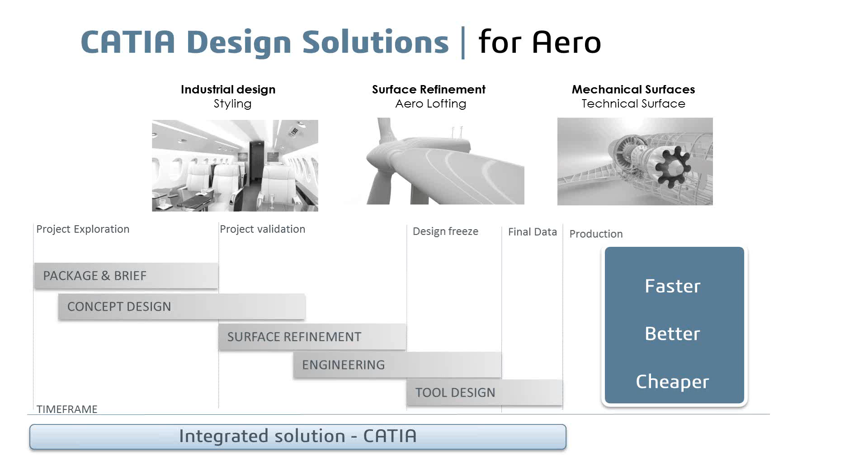The goal of addressing this new market with CATIA is to offer our customers a complete solution, allowing Aero companies to go from industrial design to lofting design surfaces to mechanical surfaces, improving the collaboration between all the organization through the creative process, from early styling ideas to technical surfaces and Aero surfaces.

So the topic of today is really to focus on creative design, especially interior cabin design. With our solution, we want to address the four key challenges of Creative Studio.

First, to help creative designers develop creativity with innovative 3D sketching and concept modeling solutions, but also at any time be able to take accurate strategic design decisions with physical prototypes and very advanced high-end visualization tools. The third point is also very important: to help the design studio collaborate with the rest of the organization, from engineering to manufacturing, and then also improve the perceived quality of the product design.

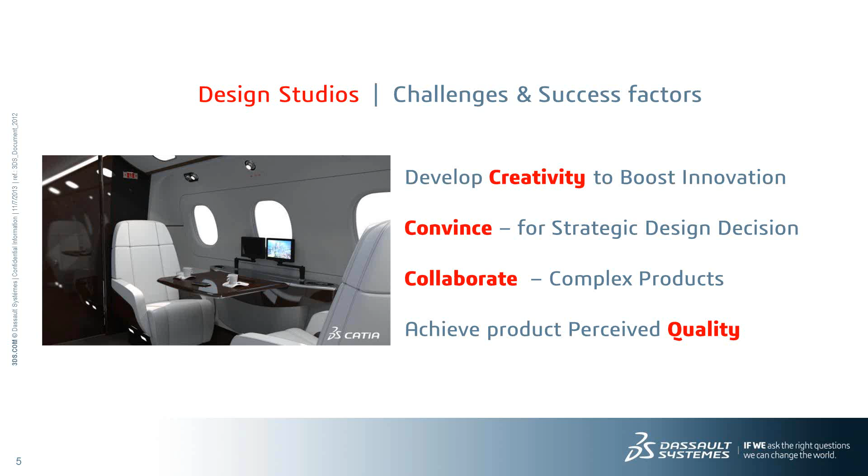So for that, we have introduced, since four years now, a new solution called CATIA Creative Design, to really cover the complete creative workflow with a unified industrial design workflow solution that you will discover during this presentation with Pierre Maillot and Fabio Bellari.

The second aspect of our strategy is really to bring 3D accessible for creative people, to make it simple, and that's why we have introduced some innovative technology like 3D sketching or virtual clay modeling, to really bring 3D back to being easy to use and accessible by creative people.

The third point, which was very important for us, was also to help streamline the design engineering collaboration. That's why it was very important for us to address the creative people with a dedicated solution on the same platform, which is CATIA.

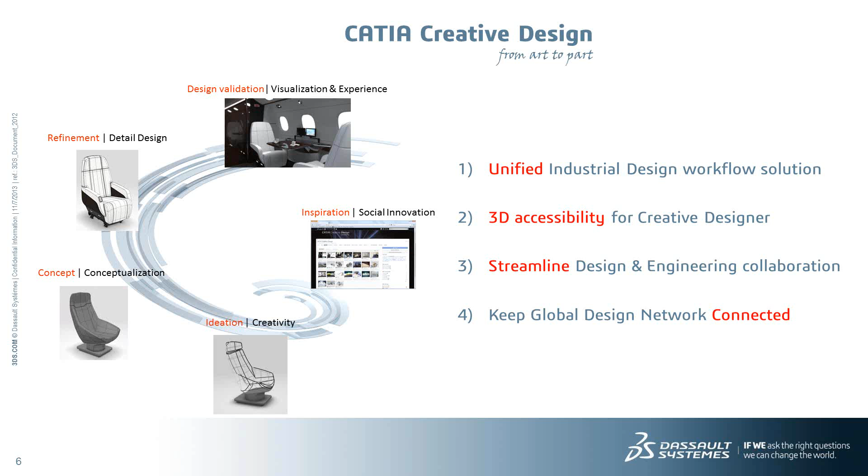And then with the 3D Experience platform, the V6 architecture, we also help the creative designers to be connected to their global network of designers and engineers.

Having said that, as an introduction, I will now give the floor to Pierre Maillot and Fabio Bellari to illustrate the aircraft cabin design with CATIA Creative Design and CATIA Icem.

Thank you, Xavier. Welcome, everyone. Here we go for the aircraft cabin design process.

Let's start with what we have introduced with our new solution, having a new way of designing interior and cabin in the aircraft industry by always starting with sketches, with 2D sketches. It could be digital or handmade. That's something we really want to keep as input for the creative work: keeping the digital sketch and hand sketches being the starting point of the story.

Afterwards, we will go through 3D sketches, and that's really something that helps us out to make this transition between the 2D and the 3D by keeping sketching and being able to do it in 3D. So that will be CATIA Natural Sketch.

Afterwards, to give surfaces and give a proportion of your final object, we will go through a 3D design exploration with subdivision surfaces of CATIA Imagine & Shape in order to quickly iterate in 3D and explore some of the proportion and size of our final object.

This interactive ray-tracing allows us to do color and trim reviews on the seat itself in order to validate the materials and also to iterate on the color and trim, but also having in-context visualization of our object, because here what we do is to design this seat in order to put it back into a full cabin design. And that's what we will see afterwards still with CATIA Live Rendering. Also being able to produce high level of renderings in order to do marketing.

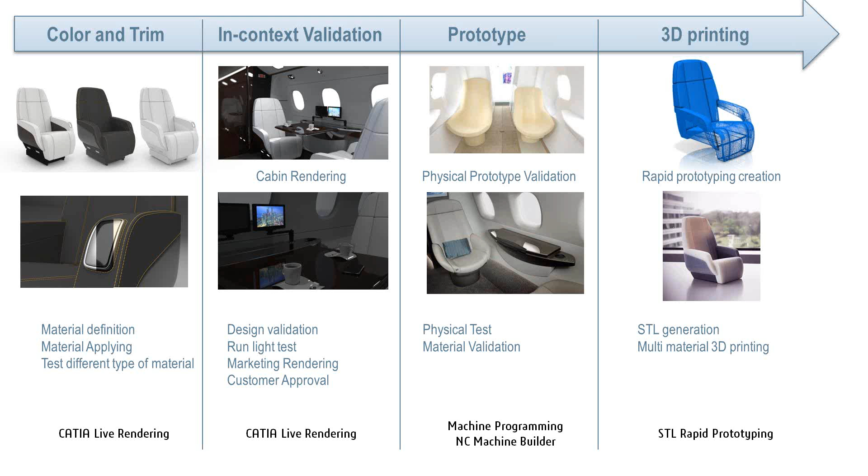And afterwards we will connect back to the real world with some prototype. It's something that we won't be illustrating because CATIA is already pretty famous for that. So machine programming and CNC machining is something that is completely embedded inside CATIA. And we will illustrate 3D printing by showcasing some scale 3D prints of the seat that have been directly produced out of CATIA using our 3D printer partner Stratasys.

So let's start now from the very beginning with 2D and 3D sketch. So in a short demonstration, I will show you how you can start, for instance, from a 3D context. Here it's the foot of the seat. You can quickly, by drag and dropping, import your sketches, so front views, side views, and use it as a reference to start your 3D sketch.

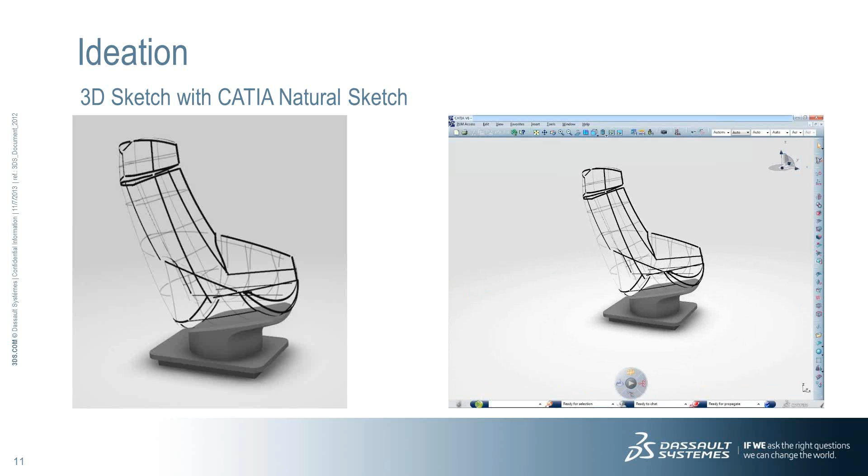Here, by combining several curves and keep on sketching, what I'm able to do is to create a full 3D curve, and then navigating into this 3D space, I am able to describe several other curves in order to give more inputs and describe completely my object in 3D. Again, at any time I can switch to perspective view, and that's the kind of results you can have after several seconds using CATIA Natural Sketch. As you can see, the interface is very simple, and we wanted to make it this way.

Now, the key value is being completely integrated inside a modeling software, so we are at any time able to generate a surface based on source curves. If we move the curves, then the surface will be changed depending on this variation. We can, of course, change the color of our brushes and add some detail. And here, the interesting point is we're able to draw directly on the surface we just have created.

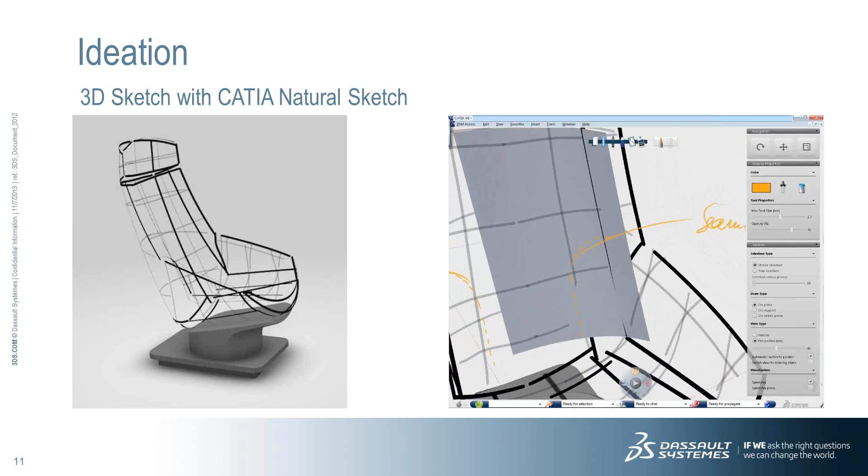So you can use any kind of support. It could be a 3D surface, but also a scan, a cloud of points, could be a support to be able to sketch on top of it. So here, for instance, and it's part of the process, is describing where we want to put the seam, and it's really giving the character to the final seat, and that's how you're able to do it with CATIA Natural Sketch. So very quickly, being able to switch and transform 2D sketches into a 3D reality with a 3D sketch.

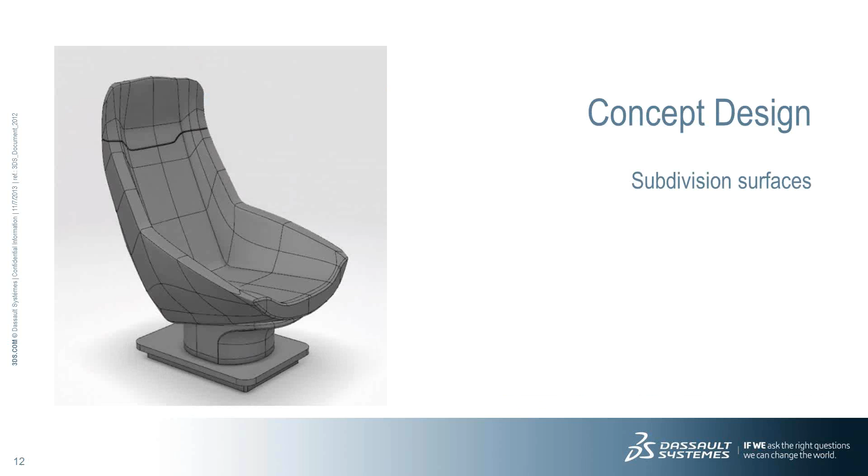Second point will be about the concept design itself. And for that, we will use subdivision surfaces, especially for this kind of design when you have very organic shapes. Subdivision surfaces are very flexible to be used in order to generate those shapes. So you can see that we start from a first surface that is already connected and start to deform it by pushing and pulling the mesh in order to generate the surface. So we are adapting it to the context of the foot of the seat.

Again, we are fully integrated inside the rest of CATIA, so it could be coming from engineering, it could be carryover from the former seat, and natively you access source data. And now using the interaction with the subdivision surfaces, we're able to add more details in order to do the armrest, for instance. And what is really nice with this kind of technology, coming from the movie industry at the very beginning, is that you can freely add more subdivision and transform it in order to generate the final shape. Also giving more smooth or hard edges in order to generate the shape that you really want at the end.

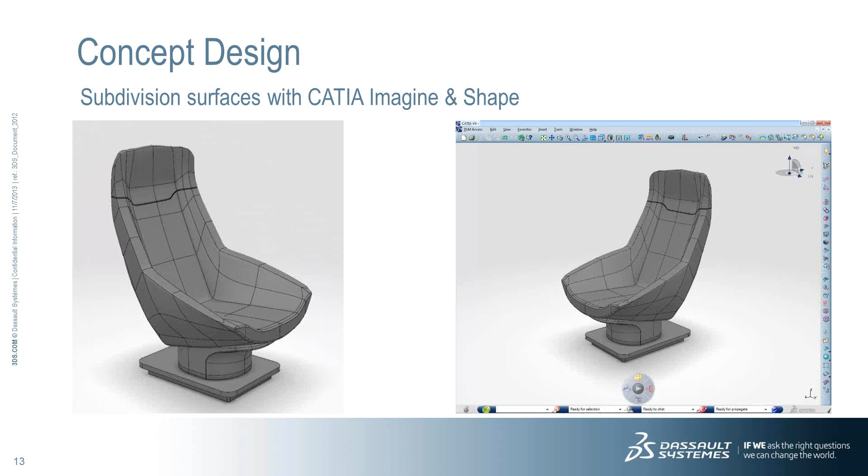Again, generating the fillet. Here, for instance, we are not satisfied with the fillet. At any time, we can change the size of it. What we wanted is, again, to do it very quick, and in a few minutes be able to generate your ideas in 3D and keep on iterating. If you want to change the size of it, change the armrest, change any part of it, it's very flexible to be changed. So now I will hand over to Fabio to go further in the process into detailed design.

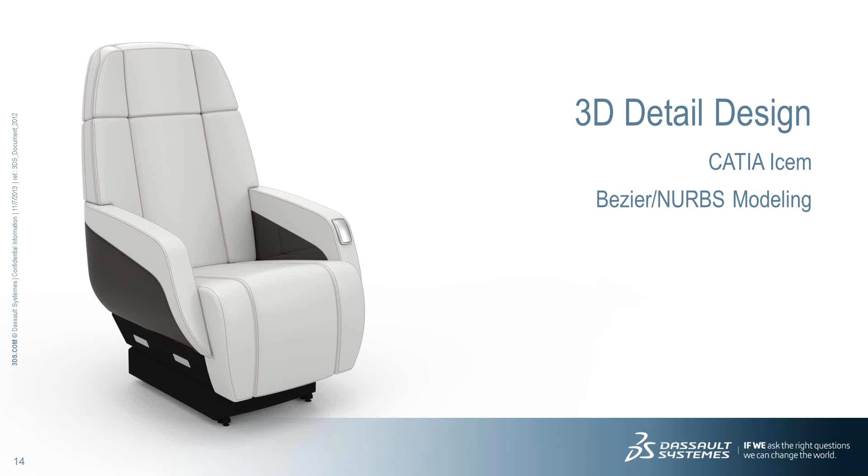Thank you, Pierre. So let's now have a look more at 3D detailed design. And for this, we will use a CATIA ICEM solution and classical Bezier NURBS modeling. Here is an example coming from the industry of a general seat. And the first thing we can notice is that the shape of this seat is really highly segmented. And in general, this means really bad quality of surface.

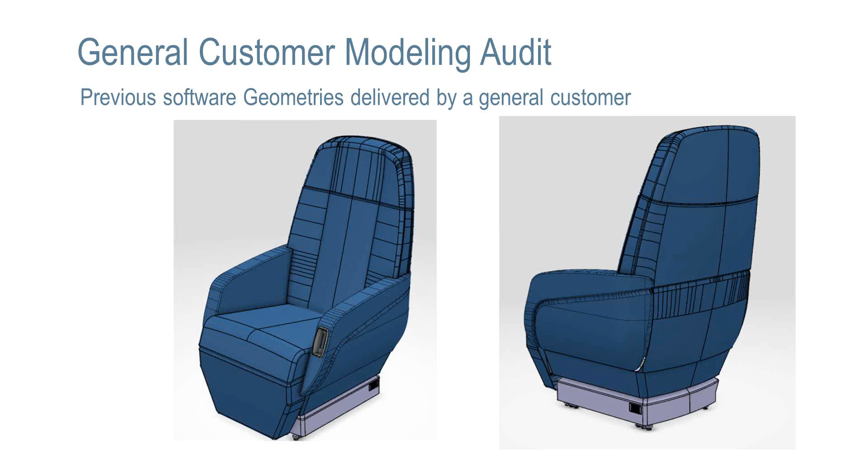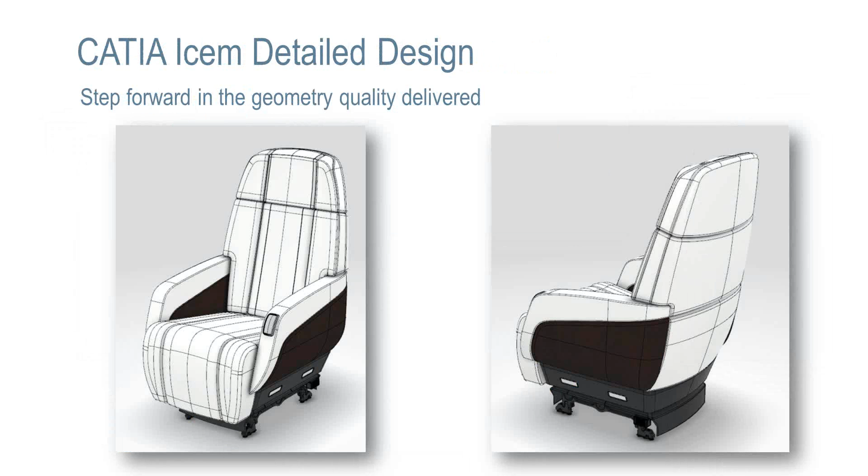So if we get closer and zoom in, we can notice that there are also some areas where filleting is missing. And as well, we can notice some clashes that are visible, and some areas where connection gaps and holes are present, and this really underlines the bad quality of this model. So we have made the exercise to remodel it back, and for this we have used CATIA ICEM technologies, and if we are getting closer, we can see the kind of result we can reach with this kind of geometry and technologies.

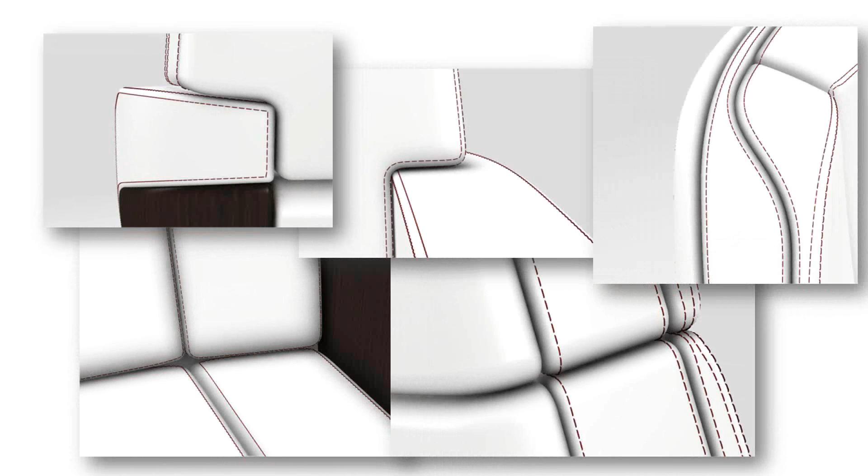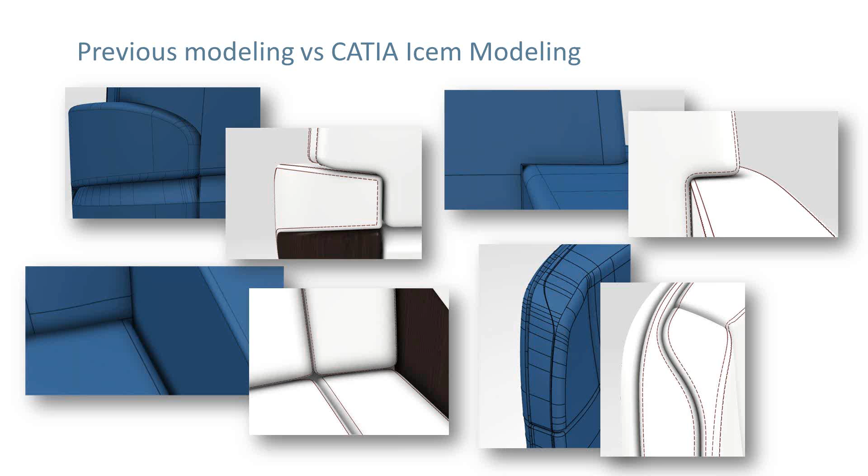If we compare the previous model and the new one, you can appreciate the difference between this kind of data. So the missing fillets are now there, clashes are no more present, and the general quality of the model, if you are looking at the gaps, is quite better. So how can we start with this kind of modelization? The first thing, we had a look at the model. We can identify 3 different kinds of area.

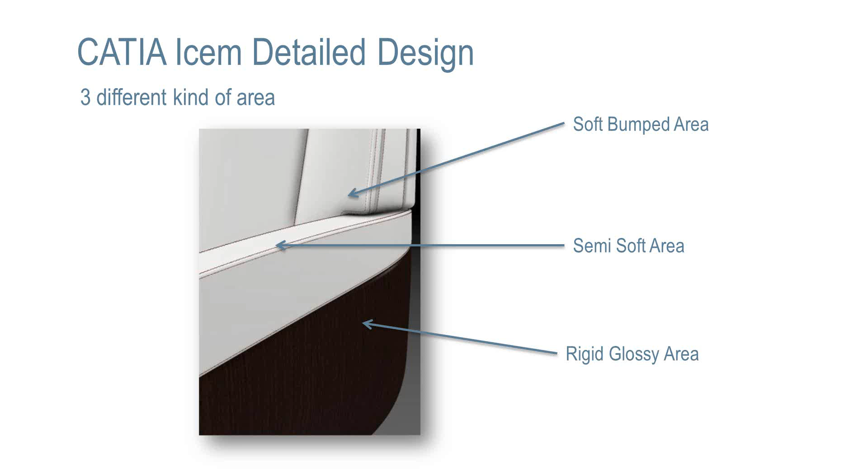The first one is an area which I call soft bump area, and this is because we really have the impression of this kind of bump, and it's covered by leather. The second area is what we call semi-soft area. It's still covered by leather, but is on top of rigid geometry. And the third area is what we call rigid glossy area.

And here you see how we can differentiate this kind of area. For the first one, we have used some function like the accelerated surface of CATIA Icem and Imagine Shape. This really to give the impression of softness of this surface. We really wanted to avoid mechanical surface effect on top of this area.

For the second area, we have used some CATIA Icem parametric G2 modeling, and for the third one, as it is glossing and reflecting highlight, we really get closer to the smoothed explicit Bezier approach, like for instance in Class A for exterior automotive.

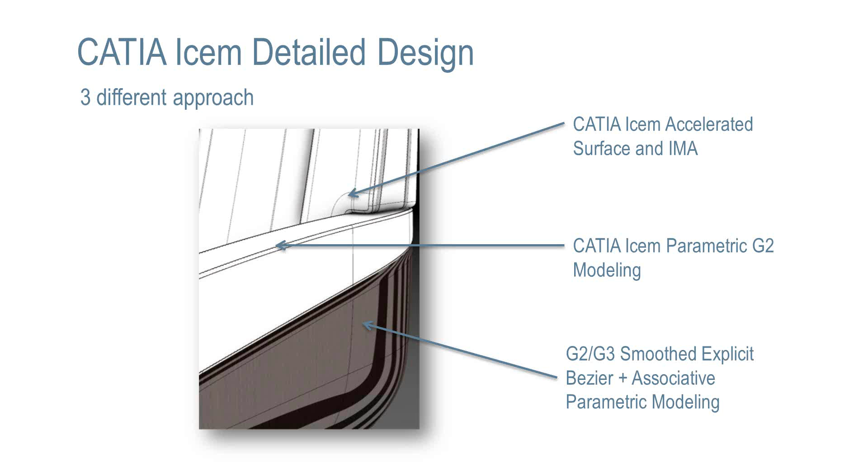And thanks to CATIA Icem, we can reach really high quality of connection up to G2 and G3, and we can really control the effect of this highlight on top of the surface. This really gives at the end an impression to have a luxury product.

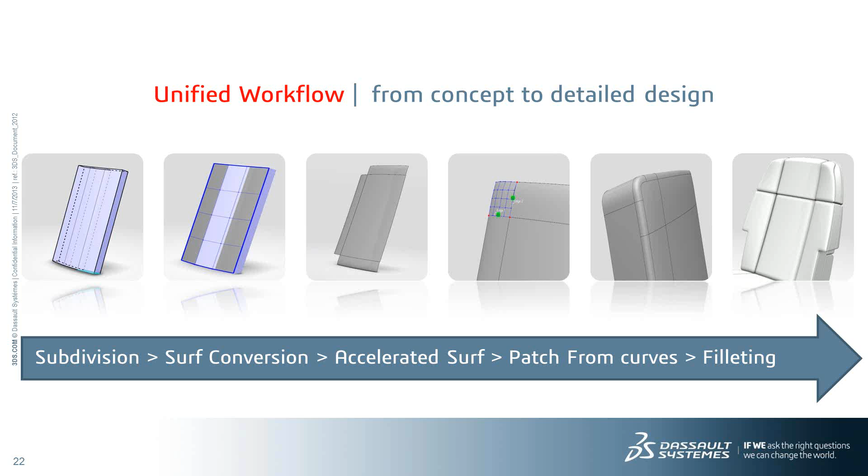So let's now dive into an example. This is a really easy and basic example. We start from a subdivision surface, then we move to surface conversion, and on top of it we add some accelerated surfaces. We close the corner with a patch from curves, connected up to G2 and G3, and then we close all the volume with the filleting. And this provides this kind of result.

Another interesting capability: we have used some advanced CATIA Icem modeling capability to project and reuse standard components from the library. So in this case, this belt has been projected on top of the shape, and we are able to move this geometry, and everything will be adapted as it is associated.

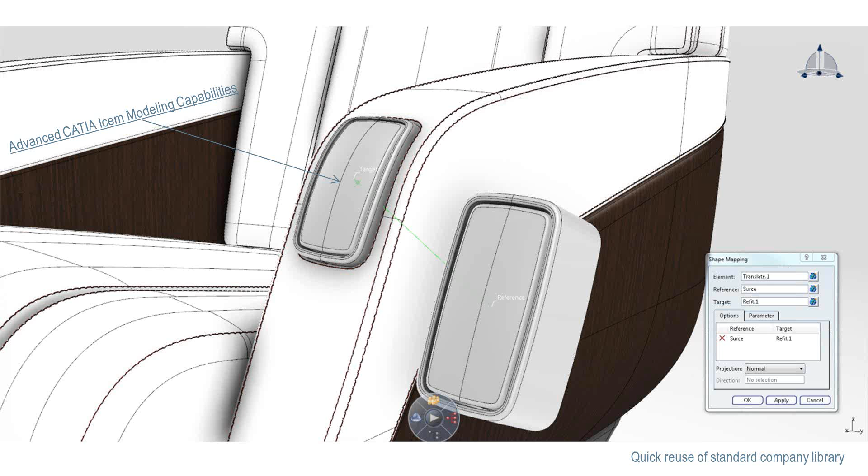Another interesting part of the detail design is the automatic generation of the seams. In this case, we are using standard CATIA capability like the knowledgeware in order to generate this kind of geometry automatically. We just select some input like the surface and the curve, choose some parameters like the step, and here we are able to generate and iterate on this kind of geometry in an automatic way.

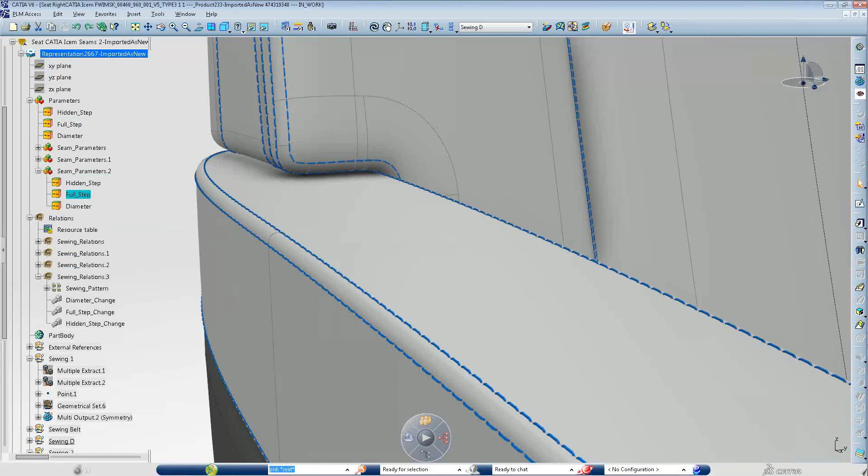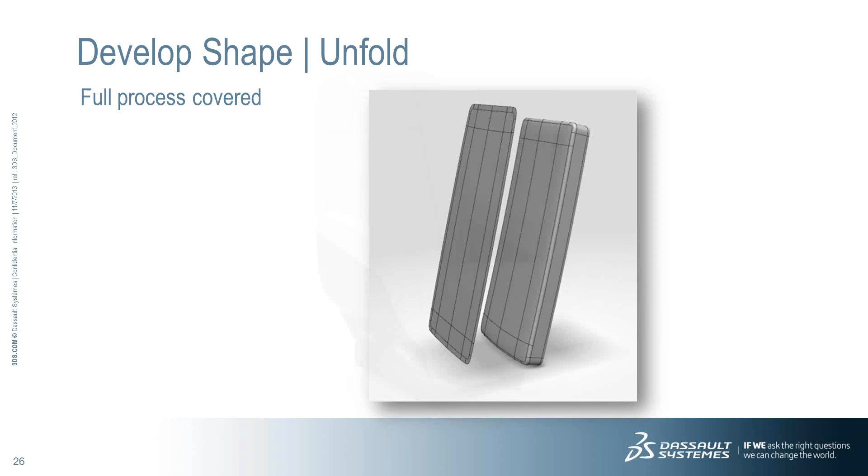And to conclude, as we cover the entire process, we are also able to generate the unfold surfaces, and this will provide us the area of the leather we have to cut, as well as the cutting boundaries of this leather. This is it for the detailed design. I give the hand back to Pierre for the color and trim and the in-context validation.

Thank you, Fabio. So as you have seen, now we have a high level of surfacing on the product, and we're able to access high-end visualization based on this geometry. What is interesting here is that we are directly working on the native data, so there is no data conversion. So that's kind of a clay color version of the model.

We will just switch to the real-time visualization, and we use CATIA Live Rendering, which embeds an interactive raytracing engine called Iray, coming from NVIDIA, in order to generate this kind of interactive visualization with reflections and global illumination for the whole cabin.

Usually this kind of situation is very difficult to do because there is a lot of smooth shadow and indirect lighting, so it's a really great challenge to be able to do it, and even to do it with interactive visualization. So in this example, we are able to change the exposure a little bit in order to generate exactly the visualization we want to have.

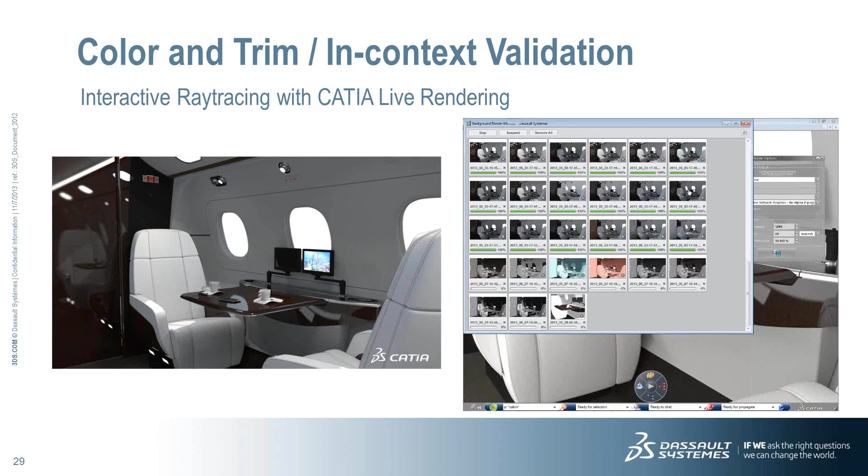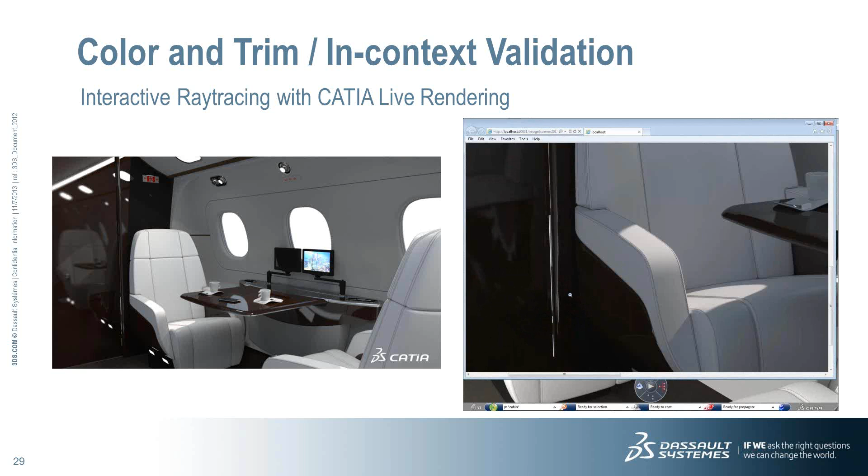We also made something very close to the photographic experience, in order to have a very simple way to generate images and to address people with a photography background. Now we're using what we call background rendering, in order to generate very high-end renderings in parallel while you keep on modifying or modeling. Because here again, you can keep on changing surfaces and just push a button and see the results with ray tracing, global illumination, and smooth shadow.

So here are some of the results of the color and trim variations we made. As you have noticed, we were able to generate the seams, and we can use them as input for the color and trim variation. We can iterate on the color of the seam and the material of the seam, but also the size and the space between each of them.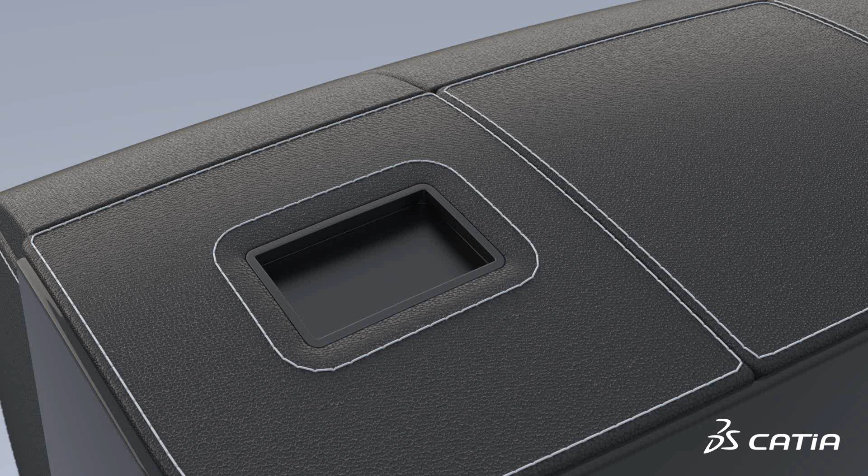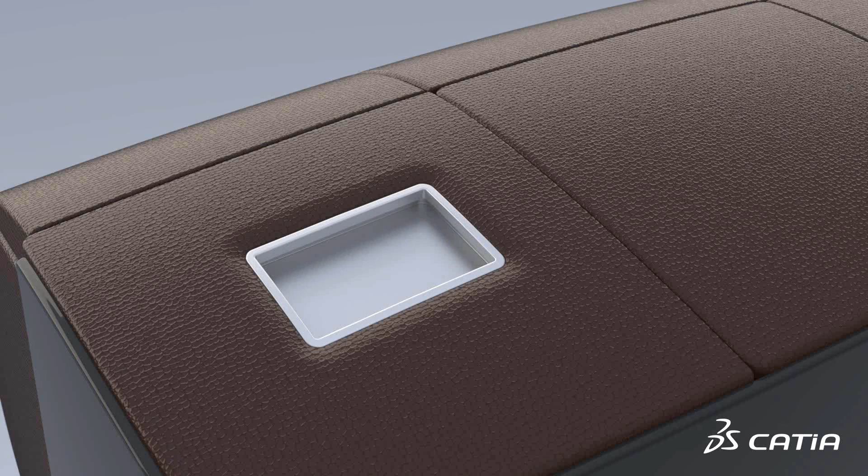Other example is about leather. We did generate advanced material with very high level of realism, combining technologies such as bump maps and advanced shaders. And so we are able to switch between several iterations in order to take at the end the final decision about the material and the color.

Let's go a little bit further about the lighting itself, because as you are inside the cabin, you have the outside light, but you also have additional lights. And you want to be able to see what is the variation between those two configurations with the light on and off, and that's the kind of thing that you are able to generate.

Another strong point is about the global harmony and atmosphere inside the cabin itself. So here, for instance, we're able to do some variation on the roughness on the side panel, the plastic side panel of the whole cabin, and see the impact on the global lighting of the cabin. So here again, it's on the native data directly. You are able to do those variations, again, to be able to take the right decision and to find the right choice for your final customer.

About material variation, you have seen it on the seat itself, but you can, of course, do it for the whole cabin, changing the finishing from glossy to reflective, and see the impact on the final cabin design. And here again, no data preparation. You can directly on the model, even if it's not finished, do those kind of rendering in order to take the right decision in parallel of the modeling.

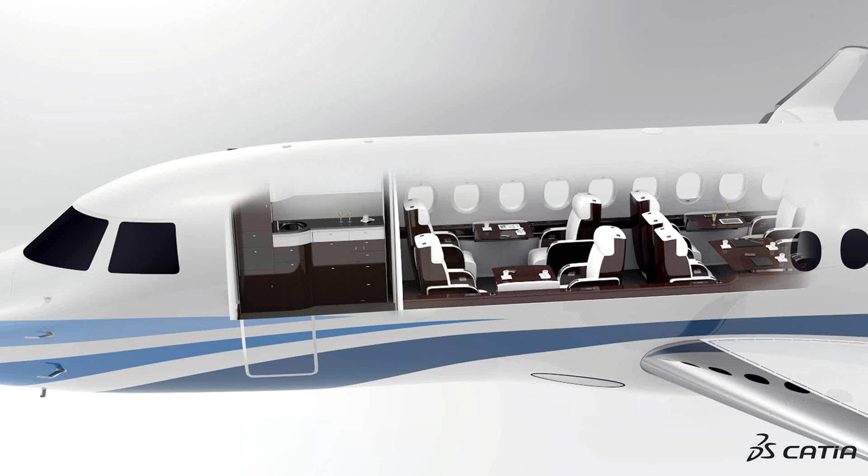Now you can imagine that you freeze the design and you want to do some communication about your model. You are able to generate those kind of high-end rendering, combining two renderings from the interior and exterior, and also do some very high resolution images, for instance, of the whole cabin, as you can see here, with all the details and also some indirect lighting and also additional lighting combined.

But now let's have a look at how we did those kind of renderings, especially those marketing renderings. First of all, just for you to understand, what you have seen is a full definition of the plane, including all the detail and even the engineering itself. Again, what you have to have in mind is, because we are inside CATIA, we are fully integrated inside the modeling environment, and all the geometry we are retrieving will be the geometry that will be produced in the end.

So you can see here the engine with a full detail engine generated by the engineering department. You can see the additional value of the ray tracing by having the reflection between the objects. And here, just as a quick example of what I was saying about being able to change the modeling at any time, here we will just change the number of blades of the engine and, just pushing back the button, access the ray traced full high-end rendering of the object.

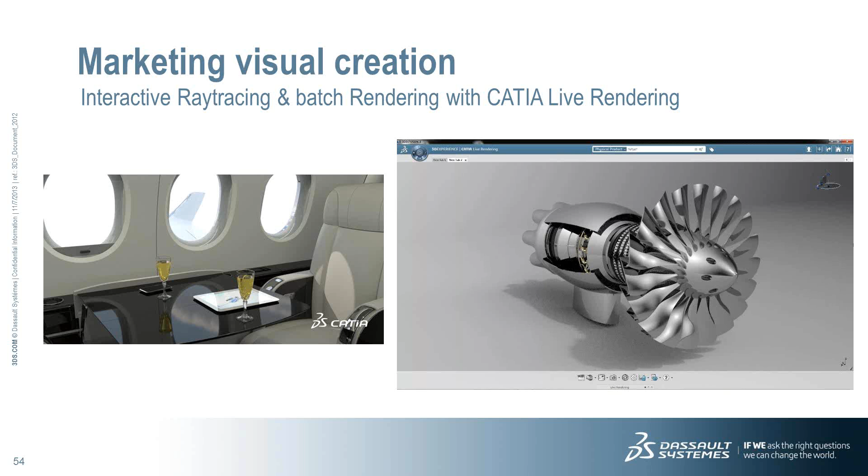So you've seen it here for the engine. You can imagine the same way for the seam on the seat, even the table in the cabin, or the cushion and the seat geometry itself could be changed, could be modified, and you can check in the whole context of the whole airplane, including interior and exterior, the impact of those modeling changes.

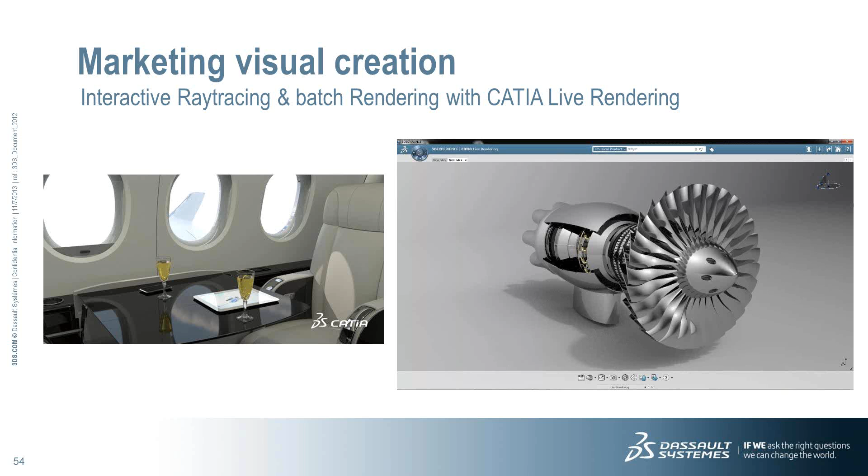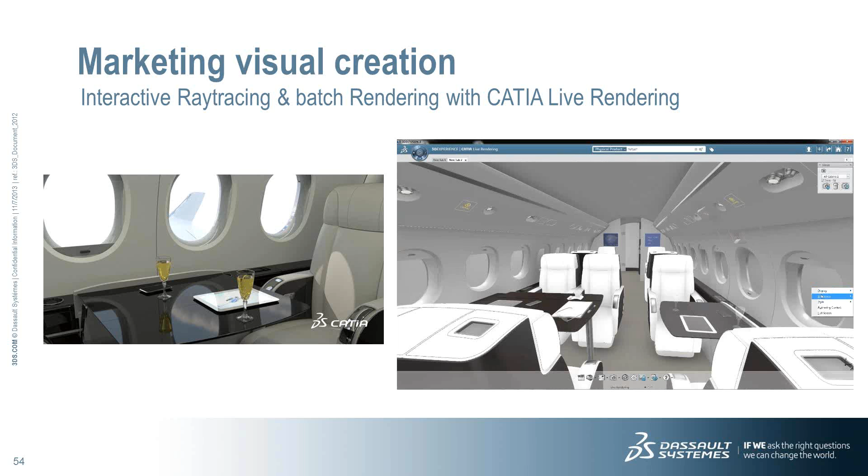So now we did illustrate this integration of the rendering engine inside the modeling environment. What we will be able to do is to switch back to the interior. So because we have the full airplane, both interior and exterior, we will just go through the wall of the cabin and enter inside the cabin itself. So you can recognize the model that Fabio was presenting, and we will retrieve a camera with the view angle to be able to see the whole cabin. So it's a very wide view angle.

What we did introduce also in our latest version of CATIA is having those kind of post-effect visualization. So you can have a hand sketch kind of visualization, ball pen or graphite pen. You can have some watercolor, and all those are real-time visualization, so you can still navigate inside your model. Here it's something close to the cel shading you can find in some video games.

A more sketchy kind of vectorial way to sketch, and some engraving old school version. So again, all those are complementary to the ray tracing. You are able to have real-time visualization and at the same time have ray tracing at any time to have reflections and smooth shadows between the objects.

So we will go back to a more photographic production. So we are deciding on an environment, here a sky with hard sun. You can see that we already see the reflection of the window in the table, a glossy table. We are changing the exposure, and here interactively we can see the impact of changing the exposure in order to see the global feeling of the cabin with whole indirect lighting. So all the light is coming out of the window and the environment.

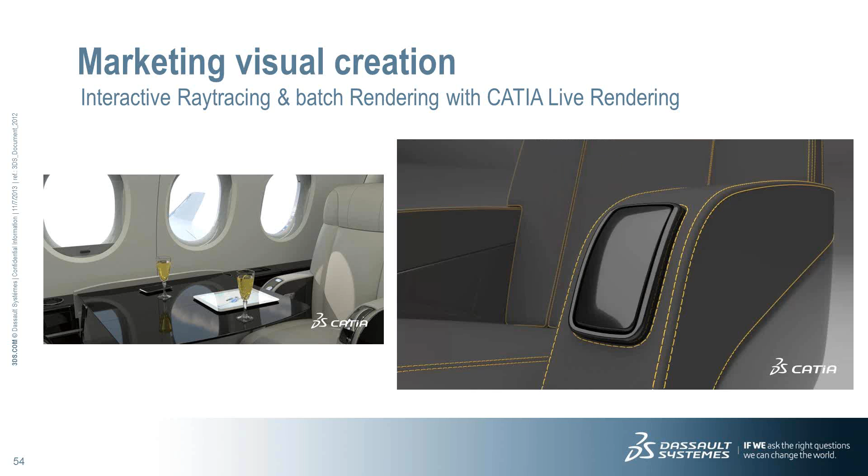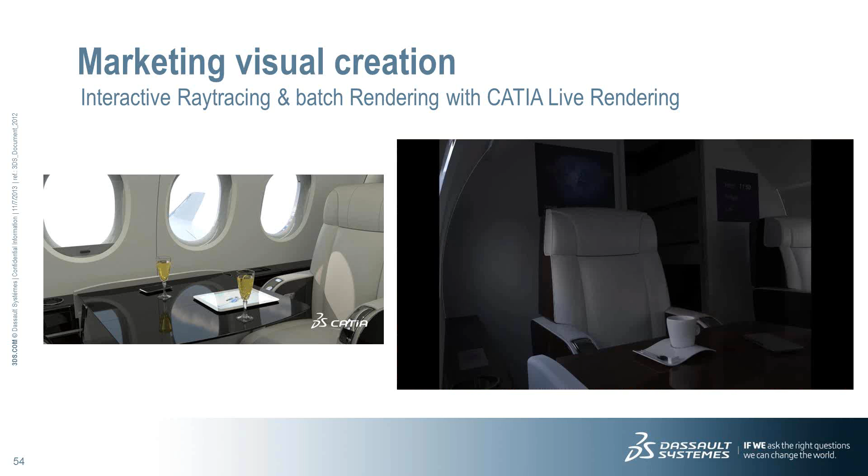So again, having those kind of capabilities allows you to take the right decisions about your materials, about your geometry, and about your lighting. At any time we are able to generate several passes, so it could be about the specular, it could be about the reflective pass, in order to do afterwards, if you need to, some compositing in any 2D compositing software. And while we were watching those images, the final image did compute, and we go through all those passes. So that was it about how to generate some very high-end renderings directly out of CATIA.

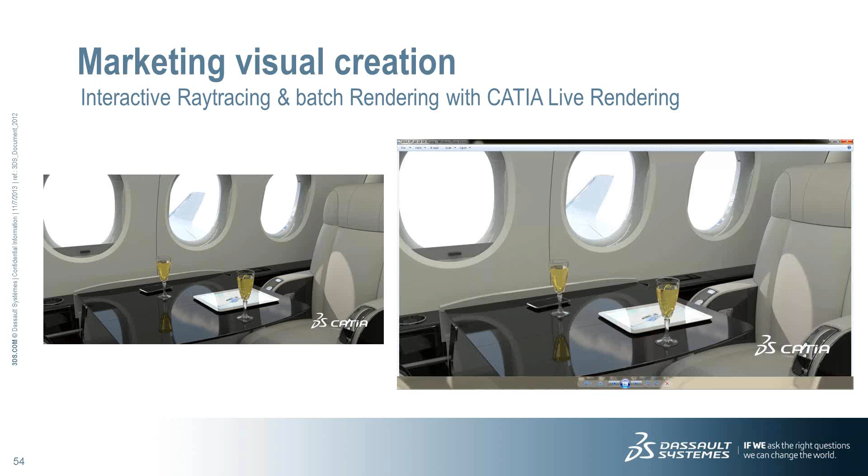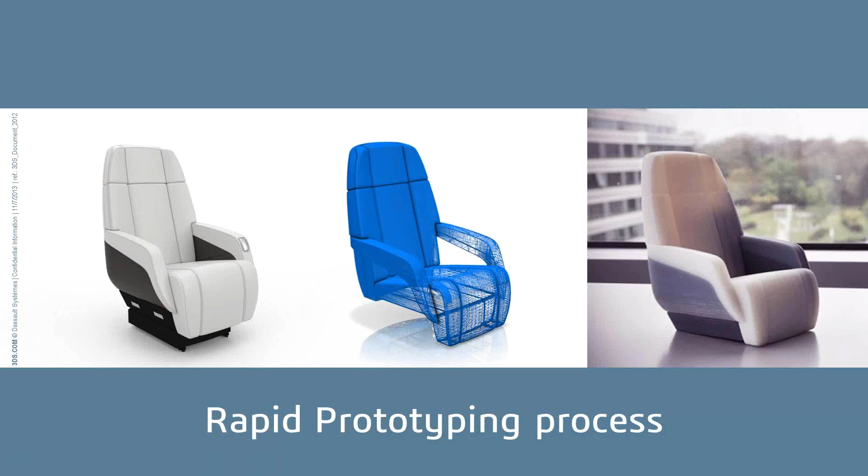Now we will go through the prototyping process using STL rapid prototyping and a 3D printer. Starting from the final model we did inside CATIA, still inside CATIA, we're able to generate the STL file that will be an input to the 3D printer.

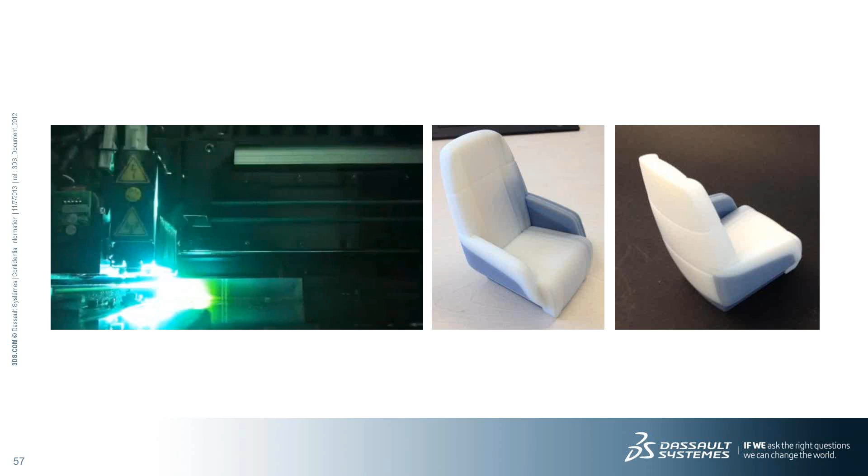Using a 3D printer, we're able to generate the seat in one shot. An interesting point about this 3D printer is that it's able to generate several material outputs in one print. Here you can see that the color of the plastic is different between the armrest and the rest of the seat.

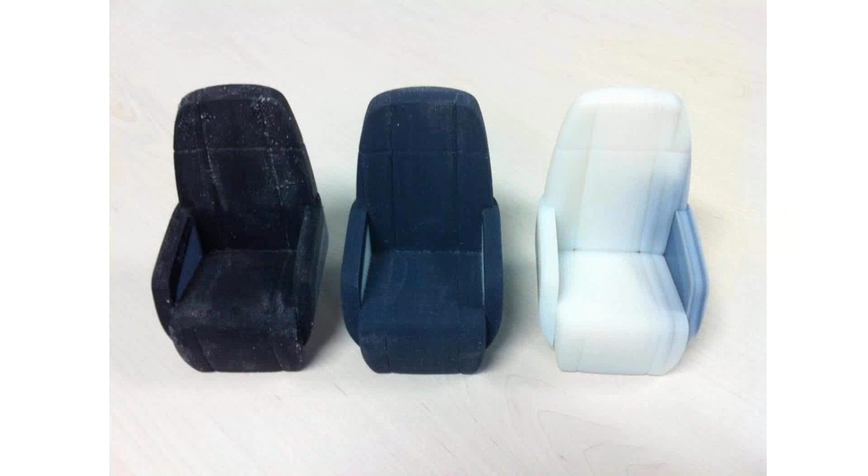The mechanical properties, for instance being soft or hard plastic, are generated at the same time. Here is a variation of a couple of seats we did generate directly out of the 3D printer in a couple of hours of 3D printing. Again, it's directly the data you have seen being designed by Fabio, the same data you've seen through the renderings.

And the input you had from the very beginning with the 3D sketching and the subdivision concept design.

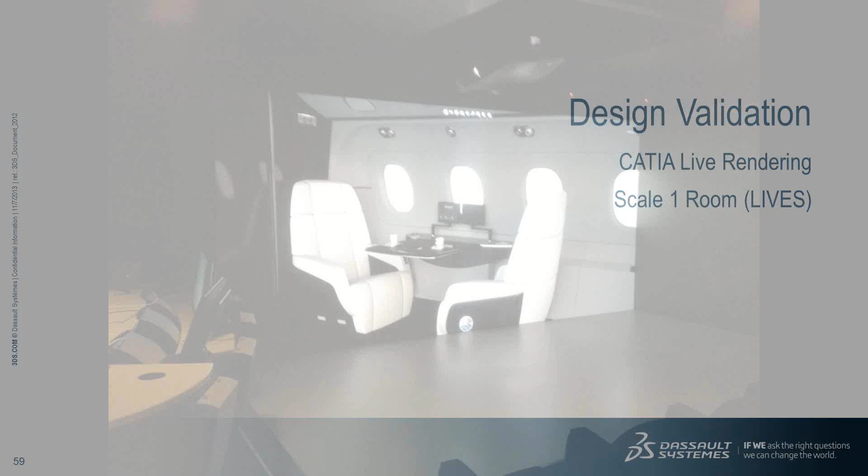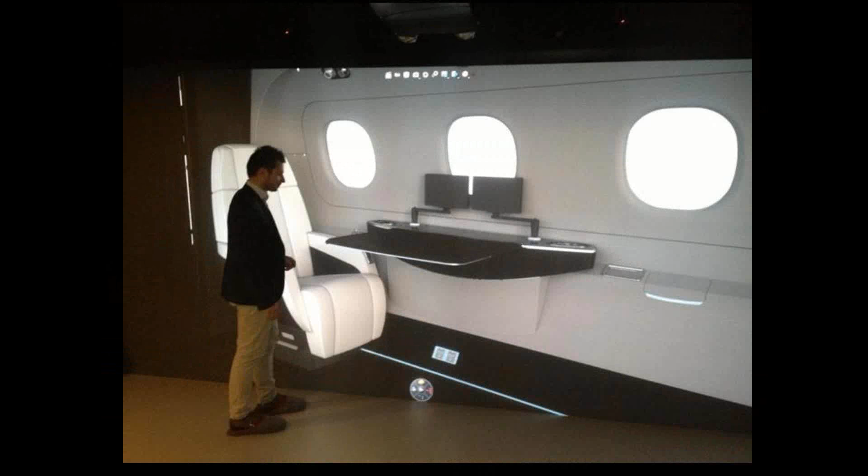Additional to that, complementary to the rapid prototyping, you also have access to an immersive room and scale 1 room. Here, for instance, it's a 5 meter by 2 meter screen with very high resolution, 4K, in order to really deep dive inside your final model and take the final decision.

It could be complementary to a virtual prototype and a real prototype, and you can even compare a virtual prototype with a physical prototype. Additional to that, we are also delivering immersive experiences.

That includes access to stereoscopic glasses and also head tracking in order to be completely immersive and be able to even move your body inside the final cabin.

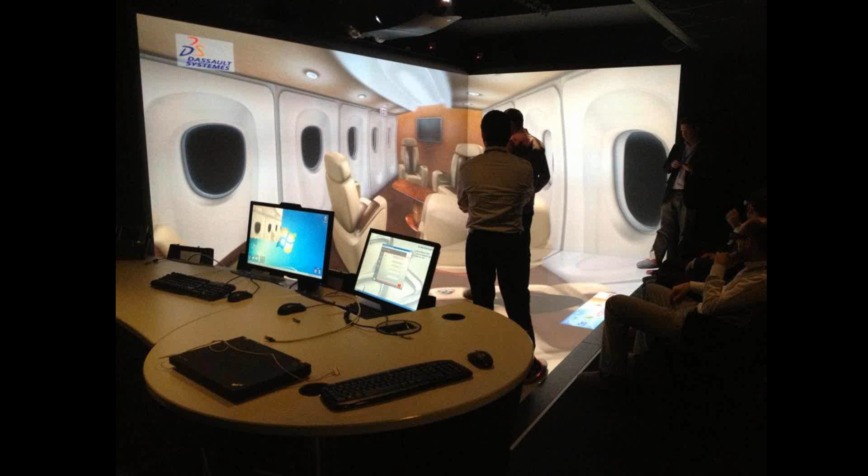What you have seen with 3D sketching has been done with some designers who never used CATIA before. So without training, they are able to generate those kinds of 3D sketches.

Another point about being able to generate that is using this virtual clay. We are able to propose many designs.

About convincing, you have seen that without any data preparation, we're able to propose and take decisions at any time. So if your design manager is just asking you where you are at, you don't need to prepare anything. You just push a button and can provide the right level of visualization to take a decision.

Same thing for your color and trim designer. At any time, you can generate some renderings and take decisions according to the in-work surfaces. So your model can still be under progress, and you can already take some decisions about color and trim, because you know that the shape does influence the material, and the material also influences the perception of the shape.

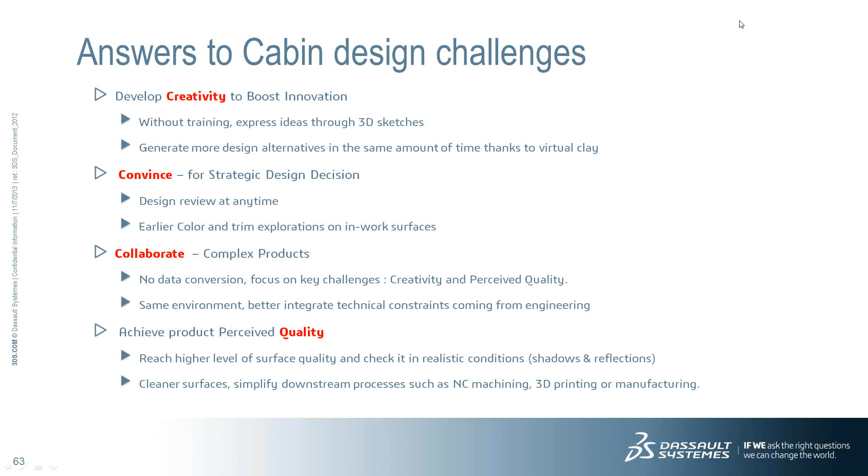And even manufacturing, because all the things that you have seen are 3D and will be used as an input for the manufacturing. So I think we did wrap up everything.